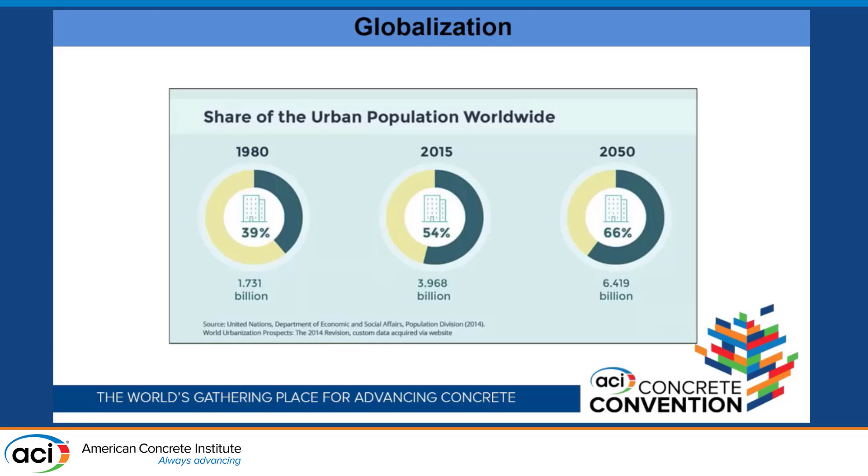So what does this globalization do? It puts a lot of pressure on the cities. These cities continue to grow, which will also put a pressure on the supply chain of the construction materials, which is already strained. The report says the DMC, which stands for domestic material consumption, is expected to double by 2050. I Googled what DMC stands for.

Basically it is the total amount of material used in an economy, including materials extracted domestically and imported, excluding the material exported. It is measured in metric tons per capita. Here's a chart that shows for different regions what the expected growth looks like compared to 2010. This is in Africa, this is in South Asia, Southeast Asia. So across the board, they're all showing that it is expected to grow, and on average, it's supposed to double by 2050.

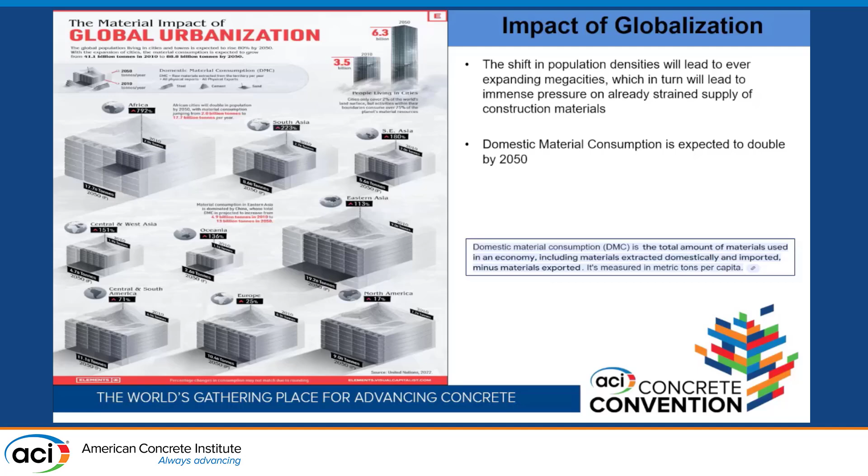Most of us have seen this chart. This is from Portland Cement Association's Carbon Neutrality guide. This is also saying that by 2050, the concrete production in the US is going to double. Agrees with the DMC report. So current production in the US is around 350 million cubic yards, and across the world it's 5 billion cubic yards. And in terms of cement, consumption in the US is around 88 million tons, and around the world is around 4 billion tons. These are huge numbers, and imagine them doubling.

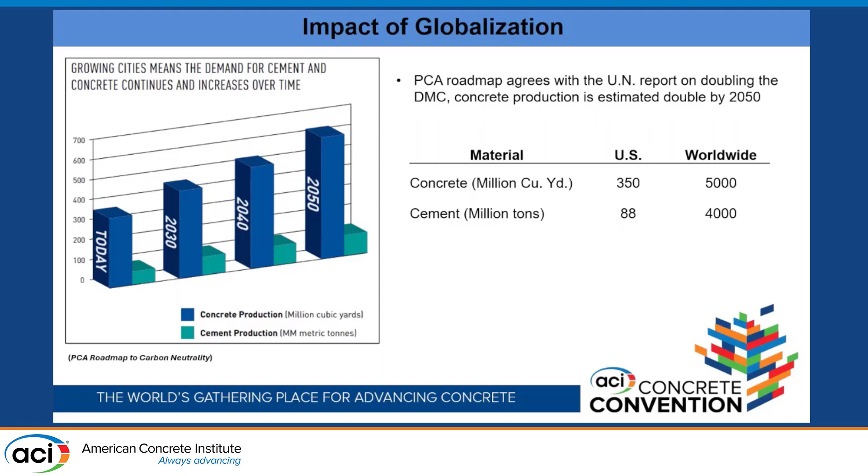So while the concrete is expected to double by 2050, cement production is only going to see a marginal increase in production. This is because of the greenhouse gas emissions associated with the cement production. Probably the most abused statistic in the construction industry: every ton of cement produces close to a ton of CO2. So this is the reason they don't want to double the production of cement. So how is the cement industry going to support this doubling concrete production?

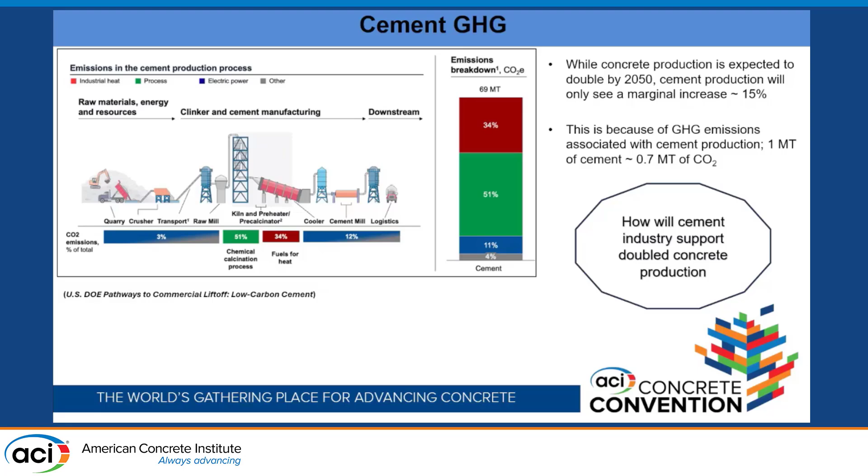There are several ways the cement industry is focusing on, but one of the main sources that they're looking into is increasing the cement production without actually increasing the clinker production. They're reducing the clinker content and increasing the supplementary cementitious materials, aka they want to produce more blended cements. Blended cements, in addition to meeting increased demand, also aid in GHG reductions. Obviously, the lower the clinker, the greener the cement.

So back in the day, we had ASTM C150 cements, which had up to 95% clinker. That was close to a ton of CO2. Now we are using limestone cements. They have clinker up to 80%. That reduces the GHG. The end goal is to produce ternary cements and performance-based cements, which will have a clinker content around 40 to 50%. That's almost like a 50% reduction in GHG just by dropping the clinker content.

But to do that, the cement industry needs a lot of high-quality SCMs. And when we talk about high-quality SCMs, sustainable SCMs, and large quantity SCMs, we tend to think about coal ash and slags. However, the same 2050 net zero goals that led to GHG reduction strategies in cement are also leading to supply shortages in coal ash.

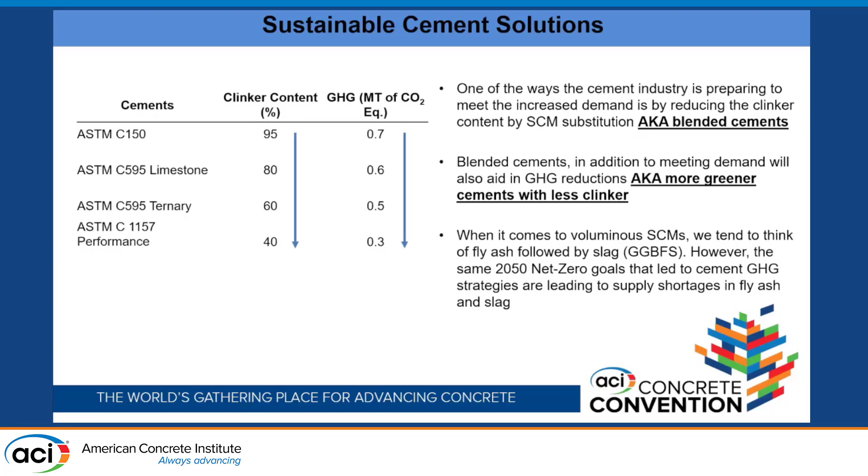Here's a chart from the US Energy Information Administration on electricity generation. This basically shows that by 2050, the electricity produced in the US via coal is going to be around 10%, no more than that. The rest of it is coming from renewables, nuclear, and others. This strategy is leading to coal power plant shutdowns. Power plants are scheduling shutdowns, which is leading to lower fly ash in the market.

Now, if you compare that to the slag situation, there's an order of magnitude difference between the blast furnace versus electric arc furnace. This is forcing the steel producers to switch from blast furnace to electric arc furnace, which is leading to a shortage in GGBFS.

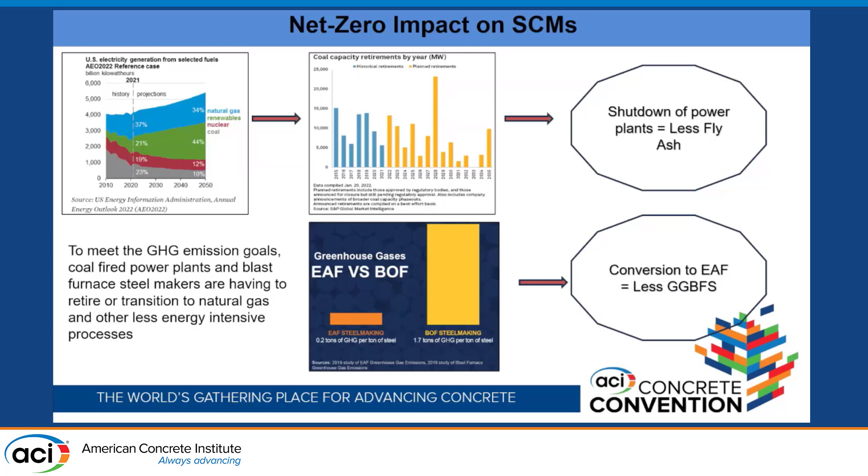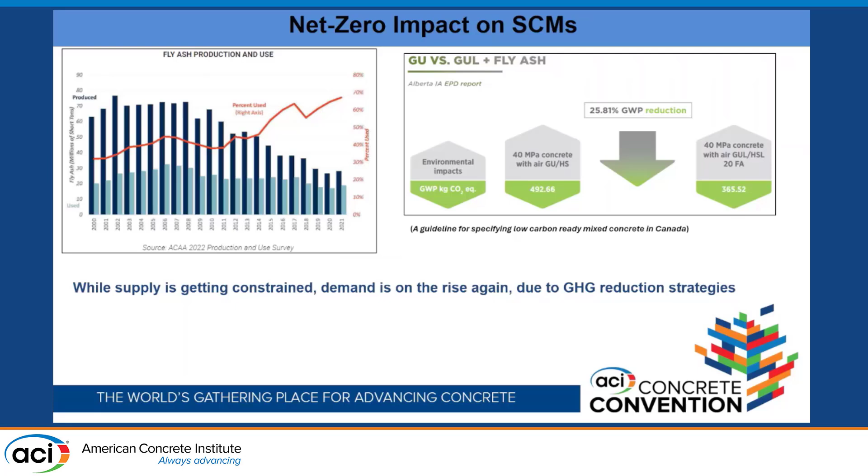So to reduce the gap between the supply and demand, the industry stakeholders are focusing on harvesting coal ash. According to an estimate, and this is what Cole was talking about earlier, there are over 740 coal ash storage sites in the US with over 2 billion tons of reserves. Of course, not all of those sites are suitable for harvesting, as they could be commingled with other plant waste like FGD, flue gas desulfurization product, or they could be far away from the population densities where these SCMs are required or in demand.

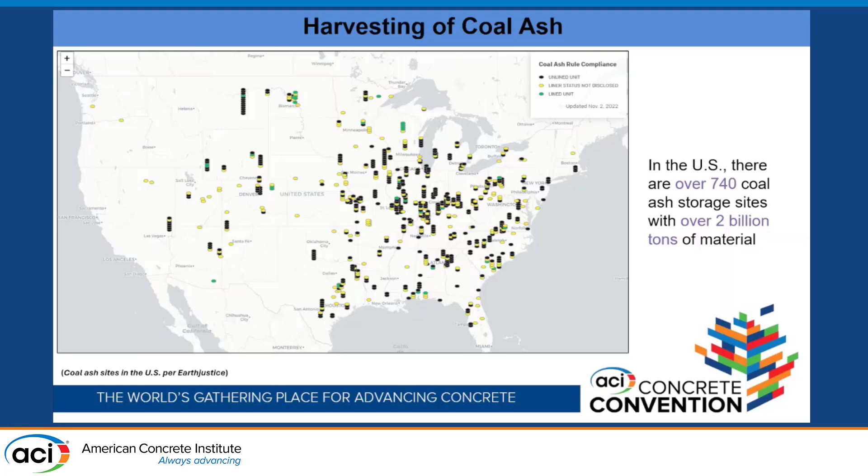So in situations where these storage sites are not contaminated with FGD, and also are in the sphere of influence of big cities where the demand is high, harvesting is a solution. Currently, both CSA and ASTM specifications have approved harvested ash as a mainstream supplementary cementitious material. And in some cases, harvested ashes do contain ground bottom ash. ASTM went a step further and established guidelines for characterizing the CCR in the landfill and also harvesting it.

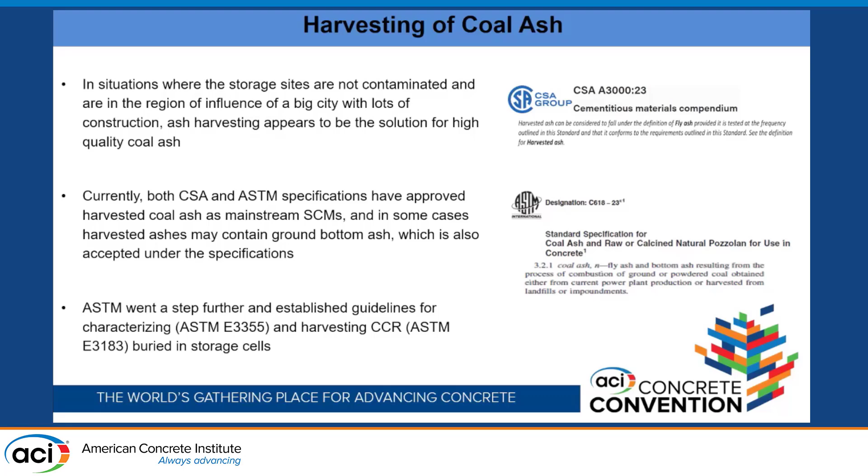Cole did a great job in explaining what harvesting looks like. I'm not going to get into more details, but essentially it involves these steps. Reclaiming and feeding, which involves site engineering and permitting, CCR excavation and hauling it to the feed bin. Drying: as Cole was saying earlier, these harvested ashes generally contain a certain amount of moisture because water was added, and also they were sitting in the landfill accumulating moisture. So they need to be dried. Usually this process involves a natural gas-aided drying process.

And then comes size control, where we want to make sure all the ash that we are harvesting and producing is uniform in its characteristics and fineness. Generally this is done via vertical mills, ball mills, or attrition mills. And in some cases when the harvested ash contains high amounts of carbon, that needs to be addressed. Usually this is done via carbon extraction units or burn-off units. And next in line is storage, where the product is stored and shipped to the markets.

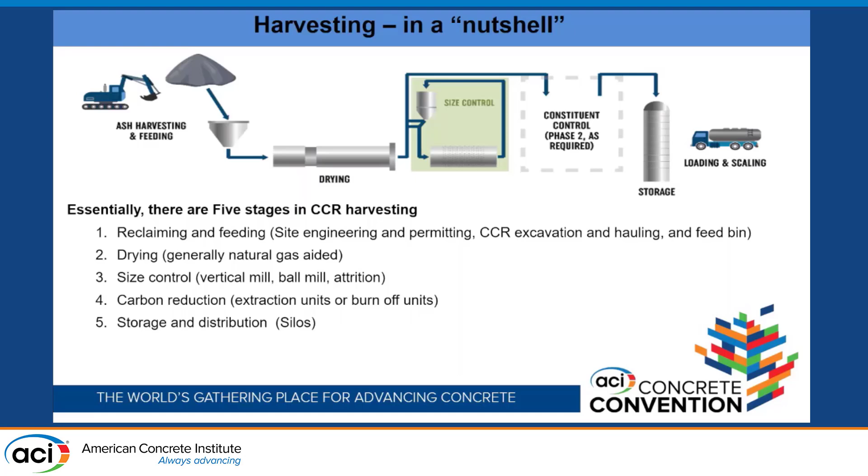Now, obviously, this is a concrete conference. In the next few slides, I'm going to show performance and durability aspects of concrete that we developed using our Battle River RAM ash. RAM stands for Reclaimed Ash Management. It's an Ashcor proprietary technology that we use for harvesting. Here are stats on our Battle River RAM ash over the last 3 years, basically an average of weekly samples that we generate in our production. The one thing that I want to highlight with this chart is the consistency in the product.

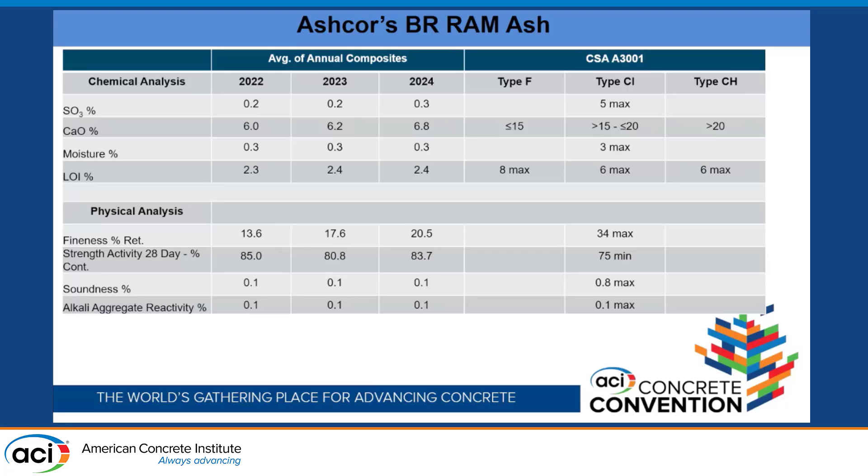So we took that Battle River RAM ash and we made a few different concrete mixes with 3 different GUL cements that are famous in this region of Alberta: GUL1, GUL2, GUL3. We replaced all GULs at 10% and 25%. Our target was 30 MPa at 28 days, and the water was fixed on all these mixes. As you can see, all the concrete mixes met the requirement of 30 MPa. And it did not stop there. The reason I put this chart up here is the concrete continues to gain strength without compromising any strength. So by 1 year, they're almost close to the control.

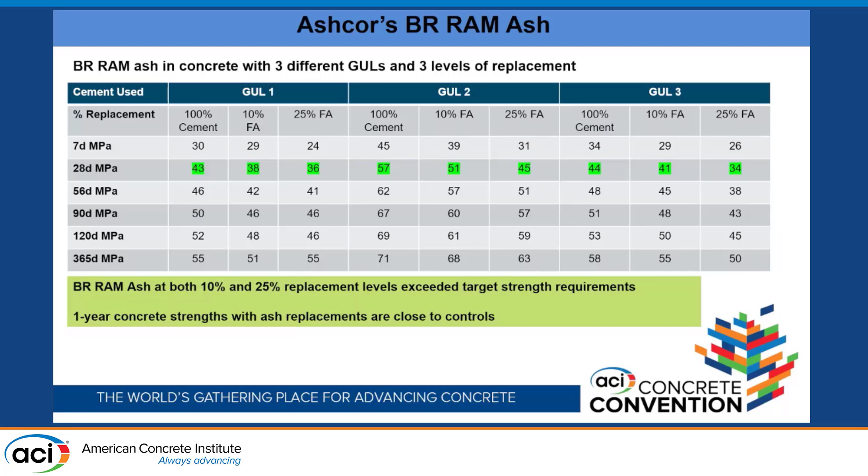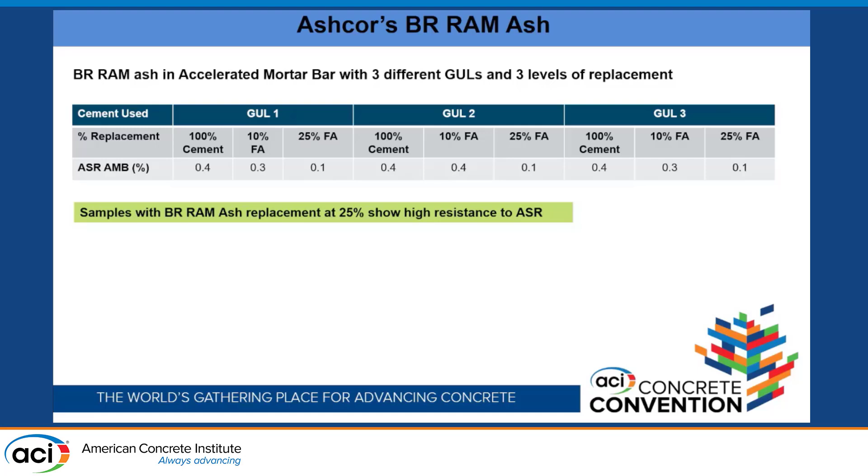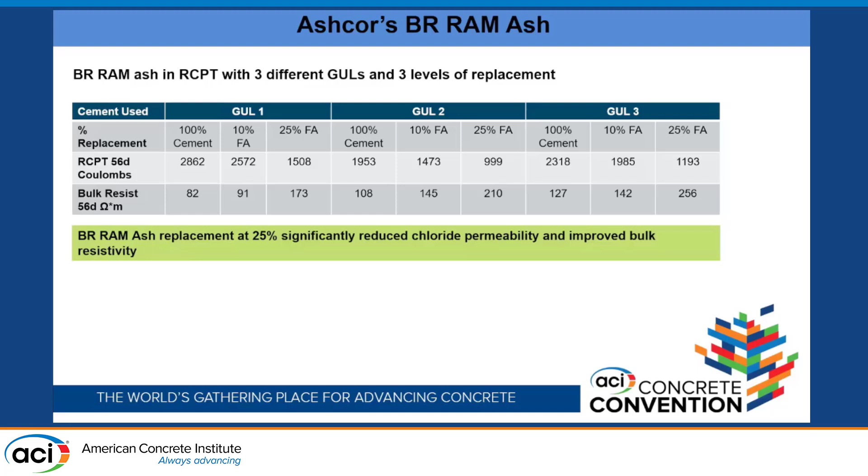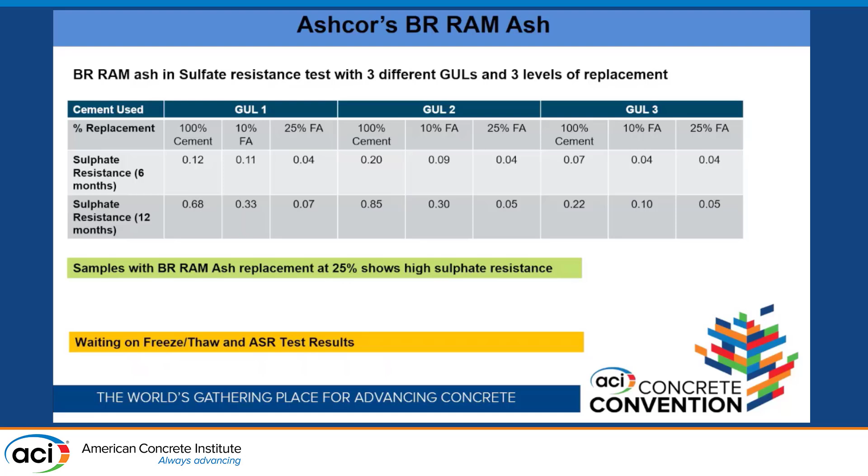So if I were to summarize the previous results, when we replace GUL with our RAM ash at 25%, it costs less. The GHGs are lower without compromising the strength. ASR performance is improved. RCPT is improved. Bulk resistivity is improved. Sulfate resistance is improved.

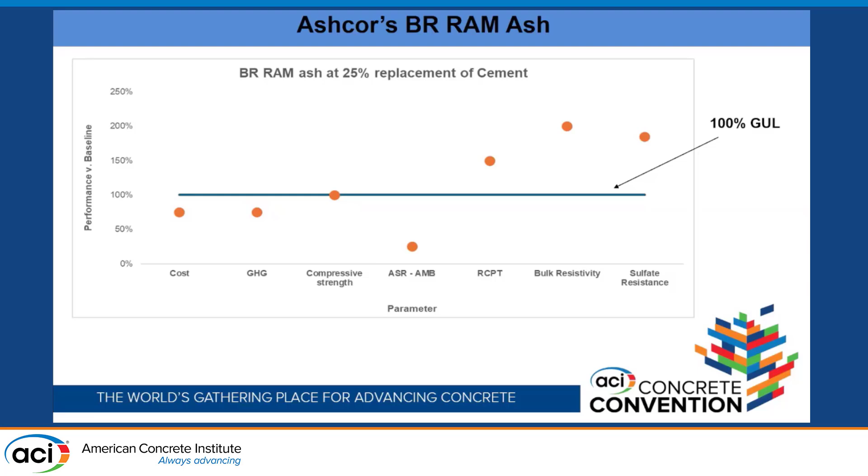So, to conclude, irrespective of the political landscape, the 2050 net neutrality goals are not going to go away. Or this is just my opinion. All studies point towards increased demand for concrete and sustainable construction materials. To meet these increased demands, the cement industry is adopting carbon management strategies, CCUS and others, and among the strategies is the clinker reduction strategy. So having a consistent supply of SCMs like harvested coal ash is one of the keys to producing these sustainable low carbon cements and concretes in the future.